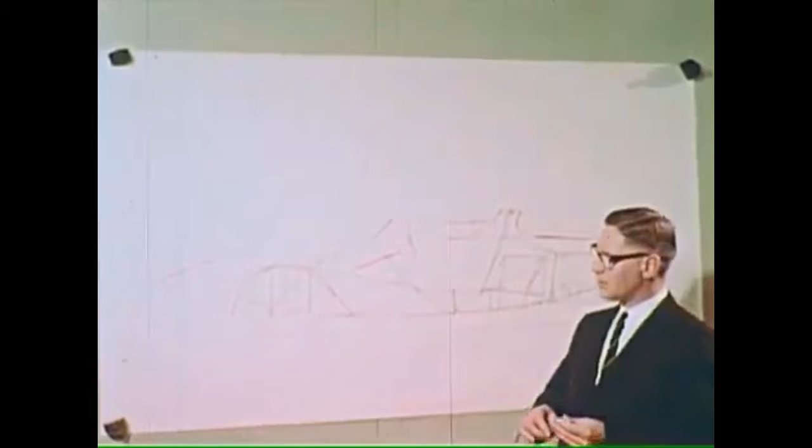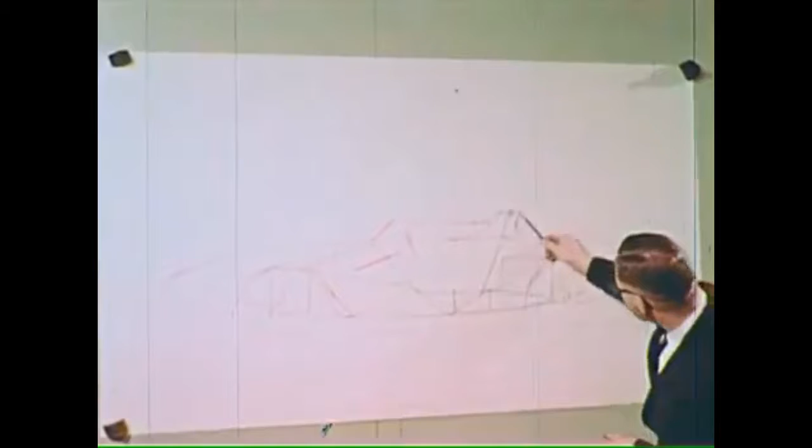He explains that his group, in collaboration with Ford's advanced stylists, have in mind certain features potentially useful in a variety of models, which could best be developed and proved out in a sports car type vehicle. He is thinking of aerodynamically clean body shapes with improved seating positions, lighter weight but stronger body structures, midship engines with proper cooling, and better handling qualities and road holding ability.

The other group in the center associated with the creation of this research vehicle was the Advanced Styling Studio, and it was here the functional aerodynamic body was designed. The low-drag, clean front end was shaped, and a safety roll bar was incorporated in the styling concept.

The efforts of the styling and engineering groups were given executive support by the vice president in charge of styling, Gene Bordinat, and the vice president in charge of engineering, Herb Misch. Together, these division heads endorsed the project.

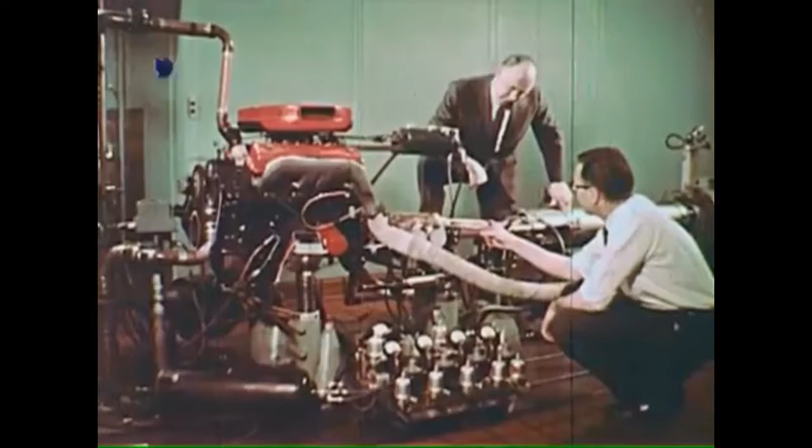Having selected a sports car configuration, Roy Lunn's group set themselves additional objectives. They would design a high-performance two-seater that would conform to Racing Category 9 of the ruling Fédération Internationale de l'Automobile and to Sports Car Club of America regulations.

Because it was purely an experimental car, the engineers chose to use a welded tubular steel space frame, strong and lightweight, for the Mustang.

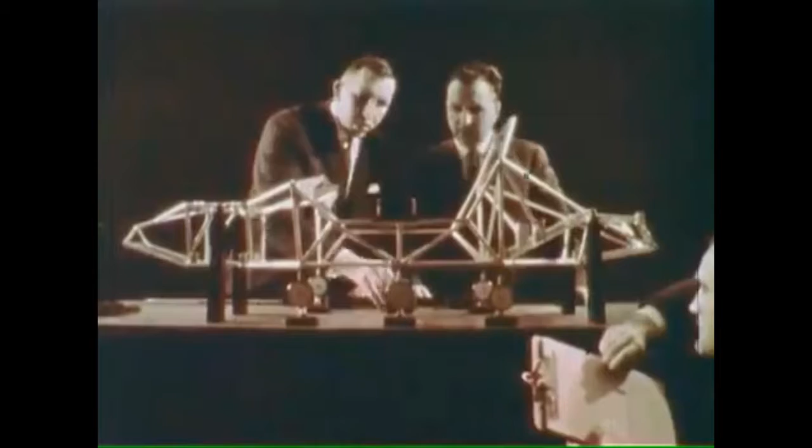The test measurements for the frame were made on an accurate scale model that provided data easier and faster than calculating the many stresses. The model is detailed down to the attachment brackets for the front and rear suspension members.

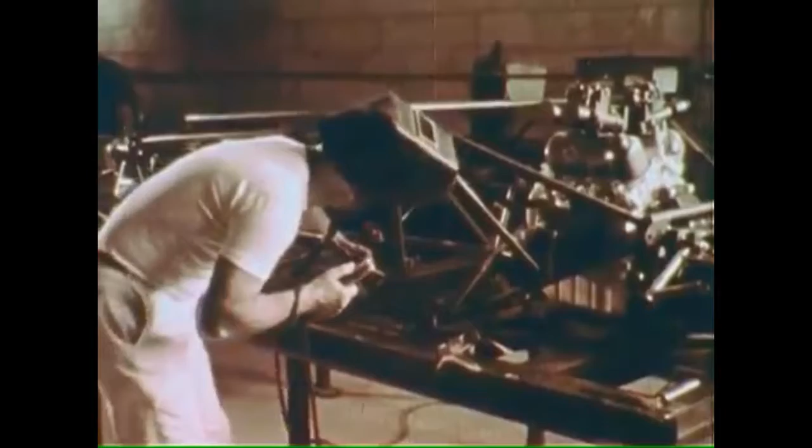The actual frame was fabricated in California by the custom car builders Troutman and Barnes. In addition to being both lightweight and strong, the space frame can be built quickly.

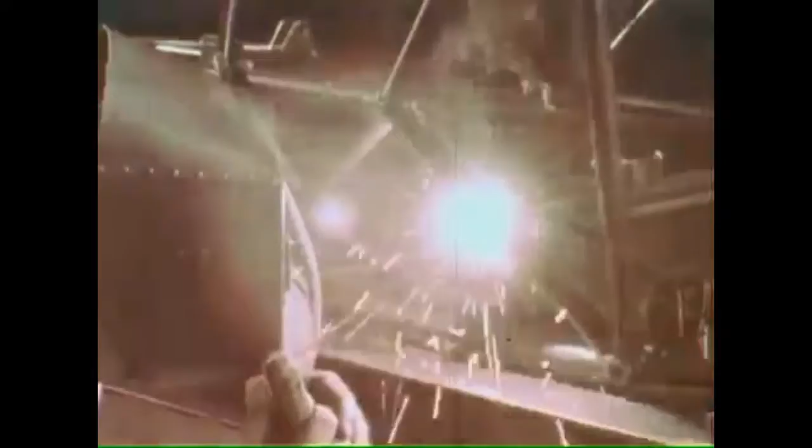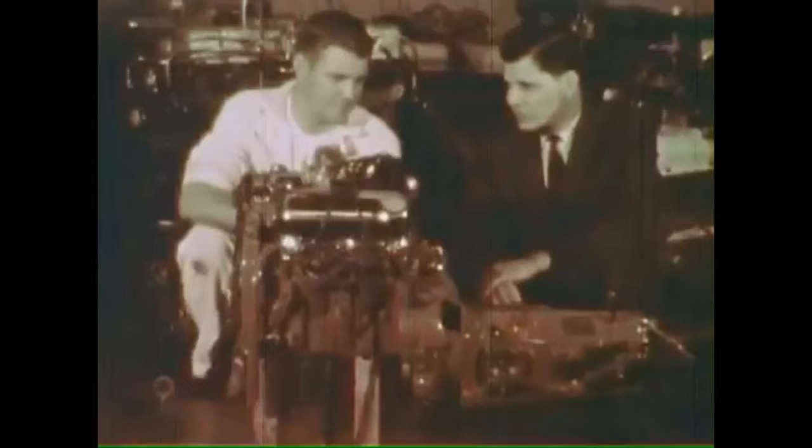The engine and transmission pose no serious problem. Ford's recently developed V4 engine and 4-speed transaxle combination, designed for front-wheel drive in the German Taunus 12M, proved a perfect solution.

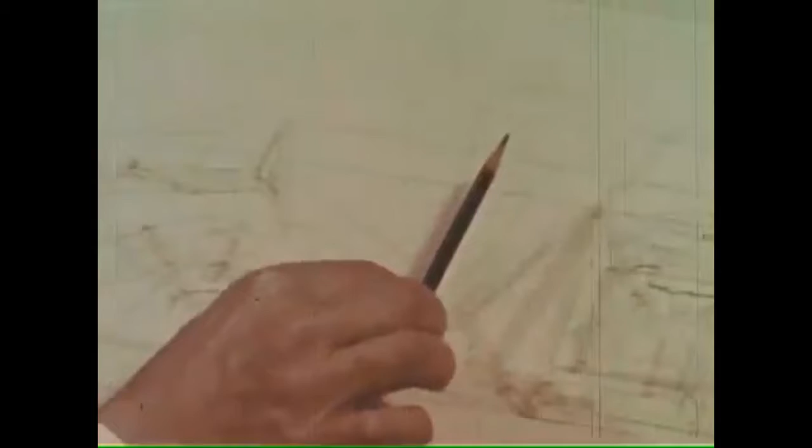While unsuited for forward mounting because of the Mustang's small frontal area, the engine moved to midships not only made reduced frontal area possible and therefore allowed better aerodynamic form, but made for excellent weight distribution because it could be placed forward of the rear axle with no change in the drivetrain.

With modifications—new cam, distributor, higher compression head, intake manifold, valve springs, and carburetors—this engine had excellent performance possibilities.

The design of the clean, small frontal area body that would be a two-seater and have a midship engine, of course, fell to styling. And after many preliminary drawings, the final design evolved.

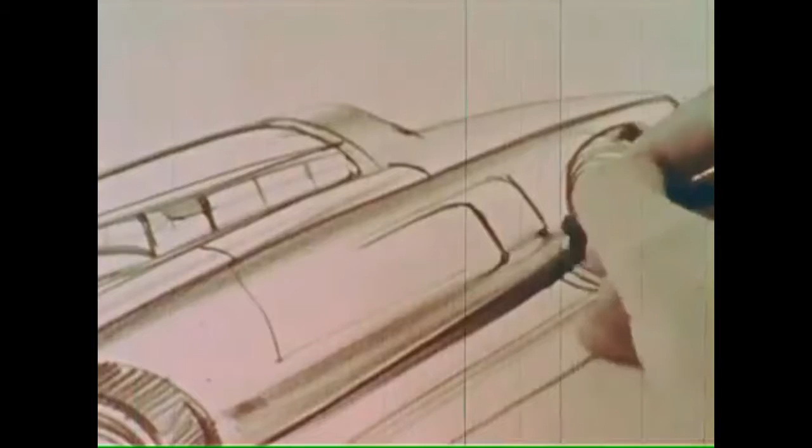Clean entry, stylized roll bar, functional air scoops at the sides—a body that housed and reflected the car's advanced engineering ideas.

Of course, the car needed a stylized embellishment to capture the spirit of the Mustang in its crest, and this was rendered first on paper, then in clay and wood, finally in metal.

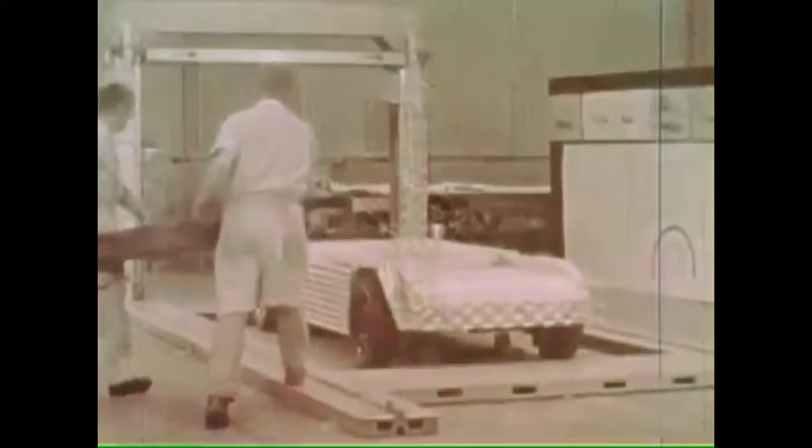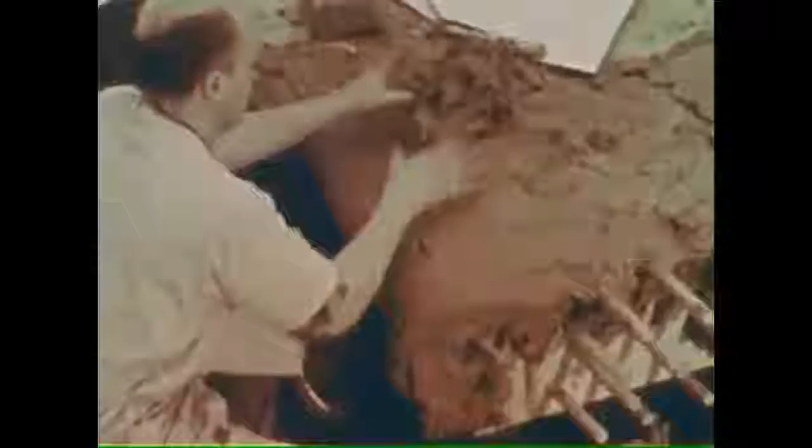The special body was first developed in clay, starting with a wooden form called an armature, which helps make a faster, lighter, and less expensive model. Special hot modeling clay is pushed and formed over the armature, hot because when cool, the clay becomes firm and hard, perfect for precise modeling.

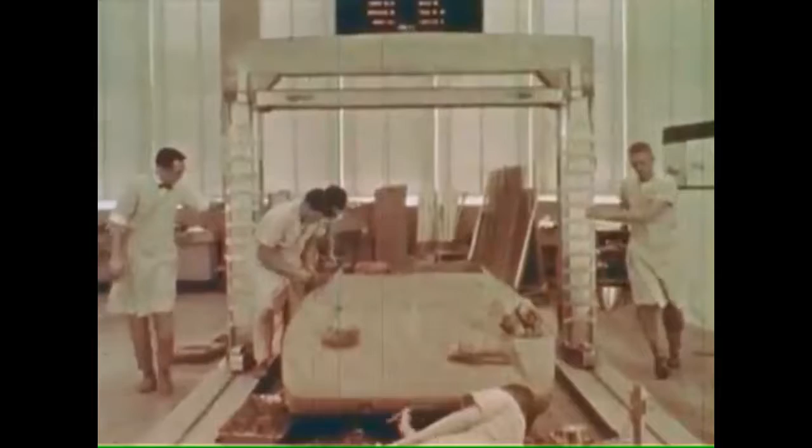A special bridge mounted on rails ensures that each contour of the side being modeled is accurately transferred to the other side.

Skillful hands and watchful eyes of the stylists do the rest, ensuring that every long, sweeping curve is true to the evolved design.

When the clay was completed, it was covered with a special plastic sheeting called Di-Noc, which looks like painted metal, yet can be applied in a fraction of the time it would take to do a similar job in the paint shop.

The American racing colors, white and blue, were chosen for the Mustang. When Herb Misch and Gene Bordinat saw the completed clay, they were delighted.

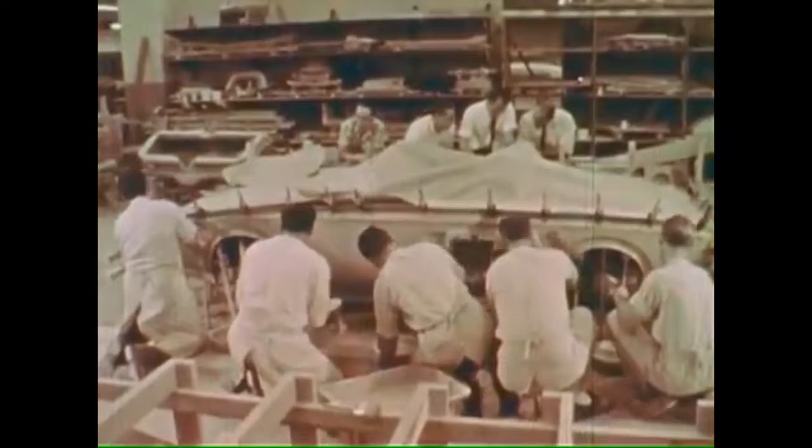With the clay approved, a female plaster mold was formed. The clay was first coated with a parting agent, then with a lime slurry, then covered with Excelsior dipped in plaster.

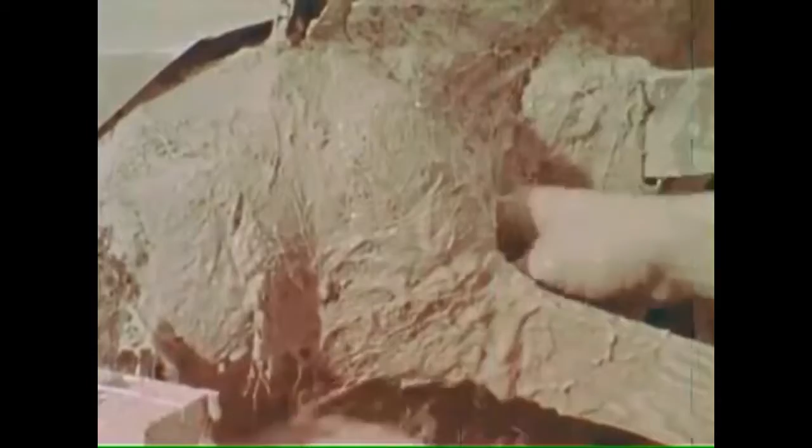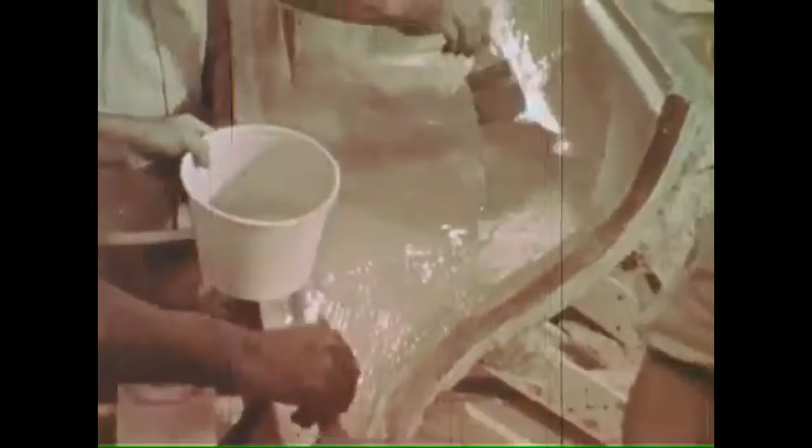When hard, these plaster molds were removed. The fiberglass body form was made by coating the mold with resin, after properly treating the plaster surface, then applying glass cloth over the resin coating.

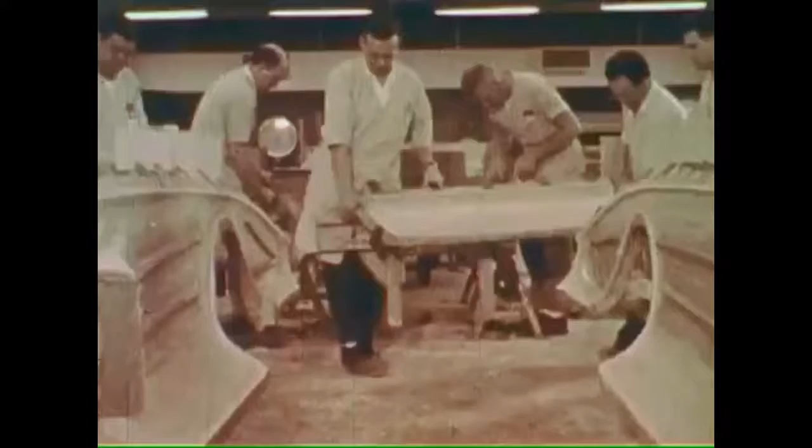Smoothing the cloth to fit the contours. After several layers of cloth and resin had been laminated, the forms were pushed back into place. When all the forms were joined and the fiberglass and resin laminate had cured, the molds were removed and the accurate fiberglass body form was finished.

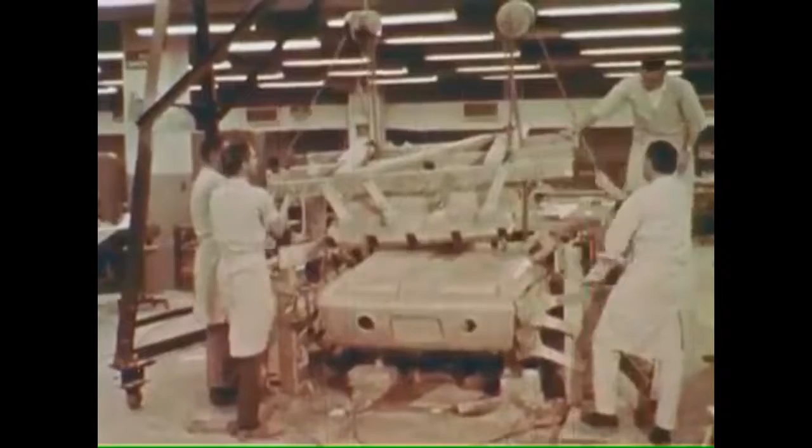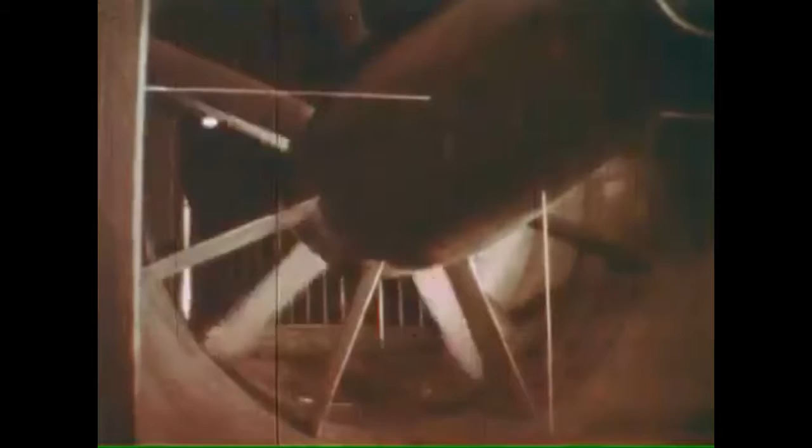After being cleaned up and painted, the fiberglass body form was subjected to wind tunnel tests. The tests confirmed the car's clean aerodynamic design and proved the effectiveness of the side intake vents, which are located at high pressure zones in the airstream.

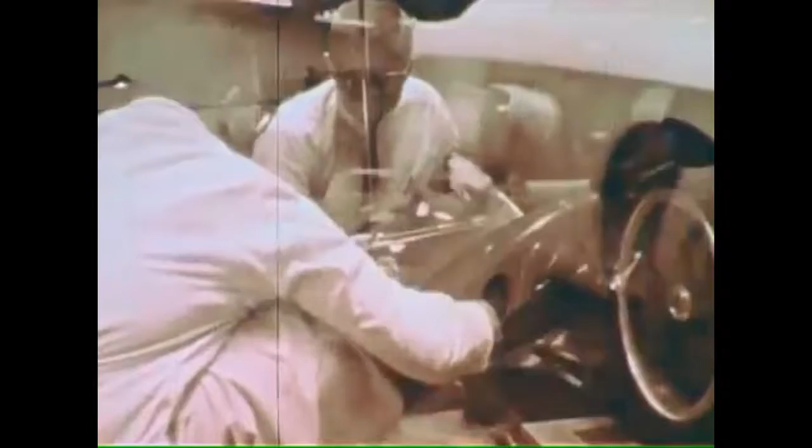Following the wind tunnel tests, the fiberglass body form was sent to Troutman and Barnes. Complete plans, specifications, and all component parts accompanied the car. Roy Lunn checked every part with the builders to ensure that everything would function properly.

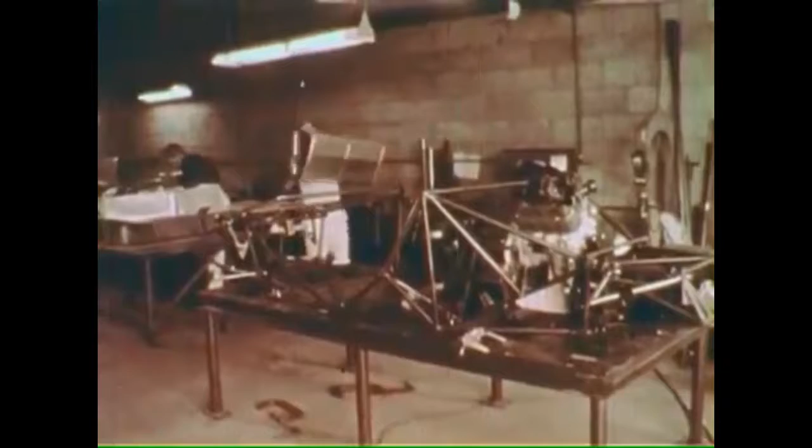The body was designed as a semi-unitized construction with the frame, which was now completed. The aluminum tank was installed, as were the one-piece special seats that were designed to be an integral part of the body and frame.

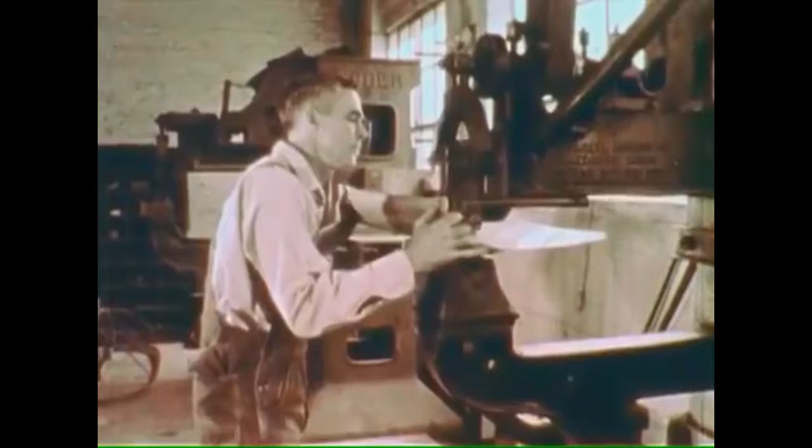The remaining body panels were formed under the watchful eyes of these expert West Coast bodybuilders, and their talented hands and hammers coaxed the aluminum into precise and graceful shapes.

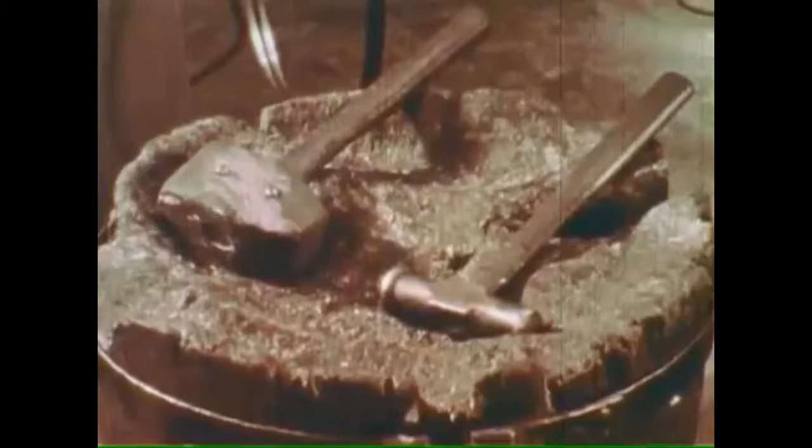When finished, each of the aluminum body panels was carefully fitted to the fiberglass body form to ensure accuracy before they were to be joined and welded to the frame.

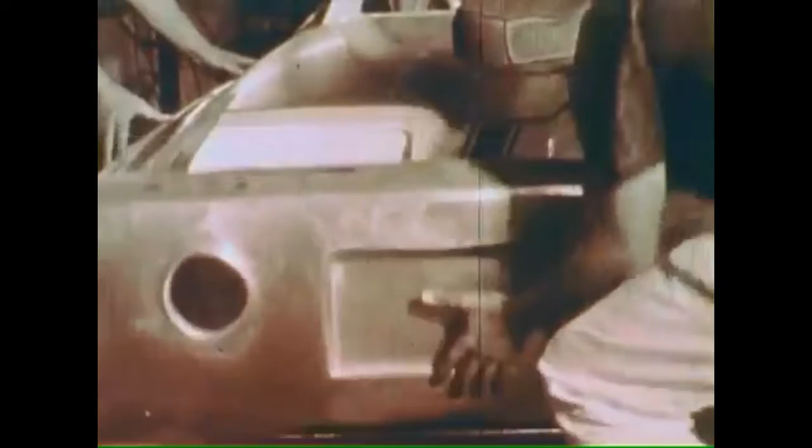The completed aluminum body was flown to Dearborn, where the Mustang was finally assembled.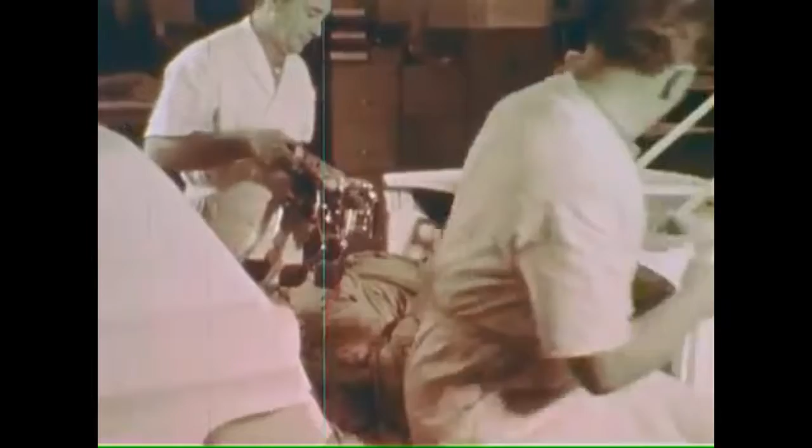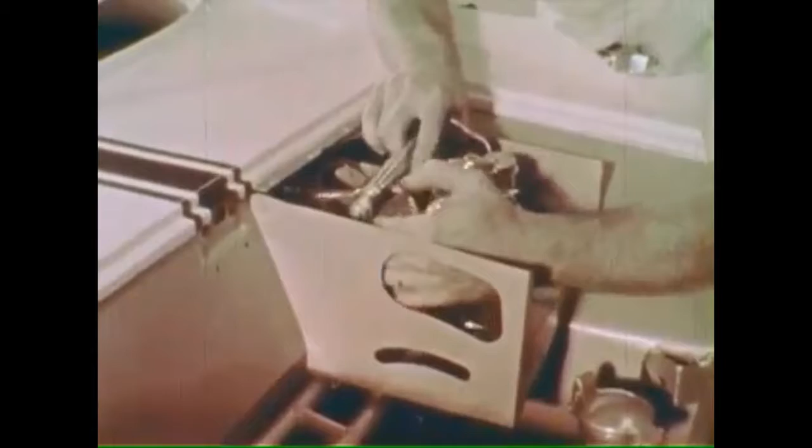First of the advanced features to be installed in the car was the adjustable pedal mechanism, providing for varying sizes of drivers. The brake and clutch master cylinders were mounted on the same unit and connected to the body by flexible hoses.

A one-piece competition windshield was put in place. The large, easily visible instruments were mounted in a padded dash with a built-in grab handle.

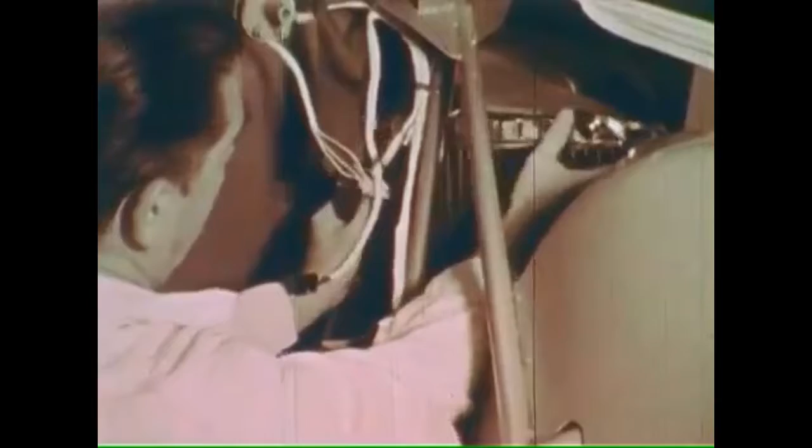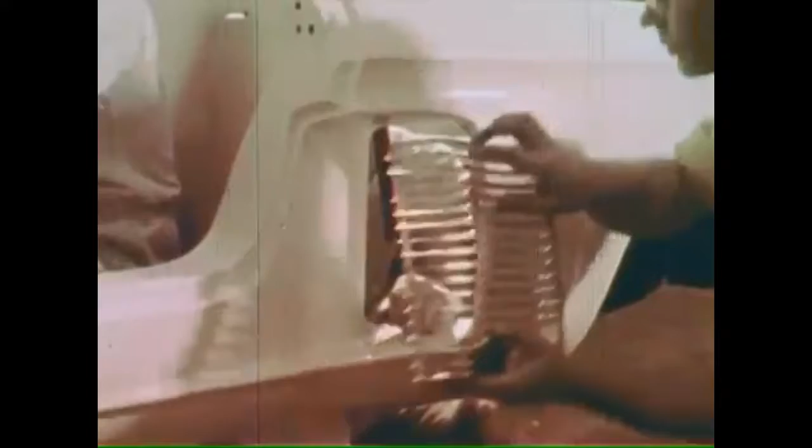To cool the engine, two special radiators were installed. Each was equipped with a thermostatically controlled fan, and each was placed behind a side intake vent.

Including the seats as a part of the body structure was an idea likely to see application in many kinds of future production cars. In addition to strengthening the body, it allowed clean, lightweight seat cushions with built-in headrests that easily could be fixed to the body, and safety belts which readily could be made retractable.

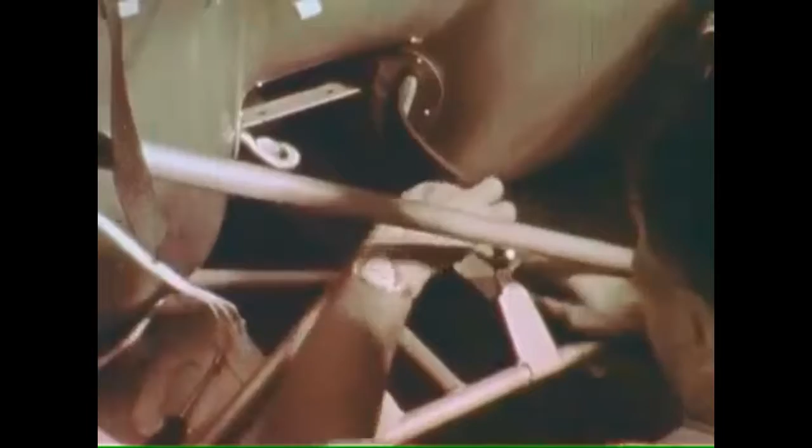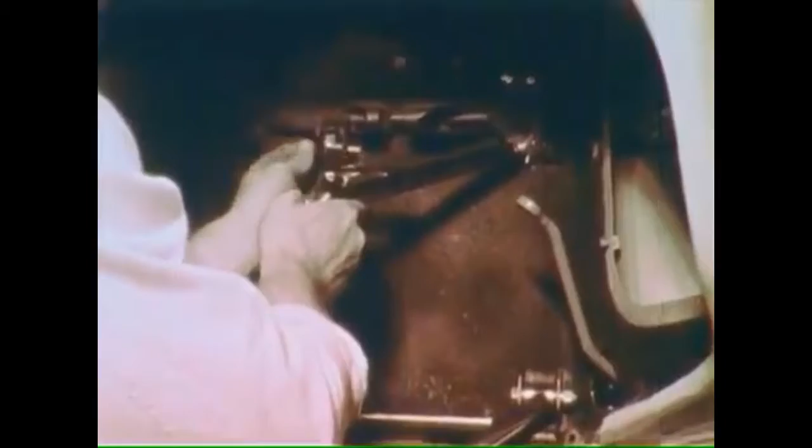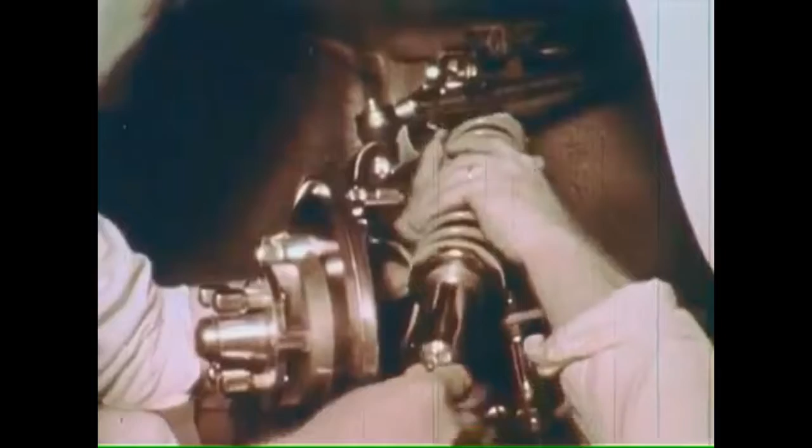Special A-frame independent suspensions were designed for all four wheels. Those in front were equipped with 9.5-inch disc brakes adapted from the Ford Consul manufactured in England. Combined spring and shock absorber units were installed all round.

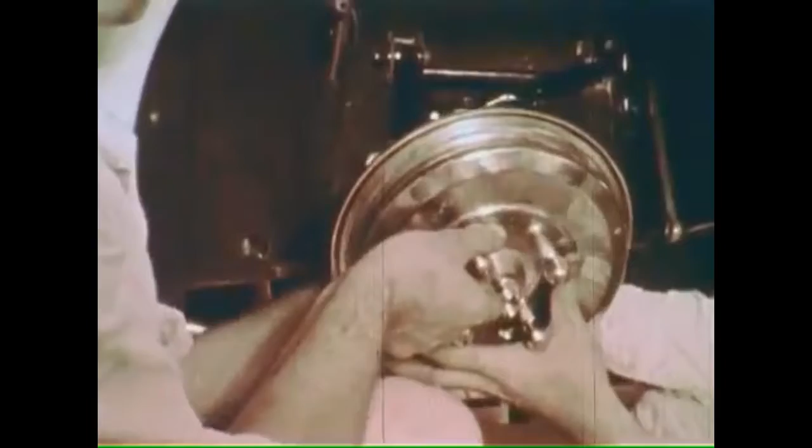In the rear, standard 9-inch drums, also from the English Consul, were fitted. And a new and unique steering assembly was designed, which has a rack and pinion steering gear, a flexible shaft, and 3 inches of fore and aft adjustment.

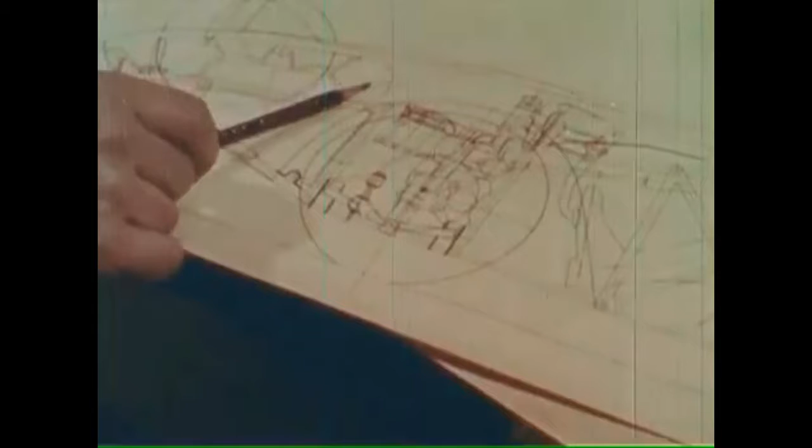The retractable headlights, spare tire, battery, and gas tank are up front. Access to both front and rear compartments was provided, with front-hinged doors on either side. Exhausts through the rear, and all necessary lights were provided.

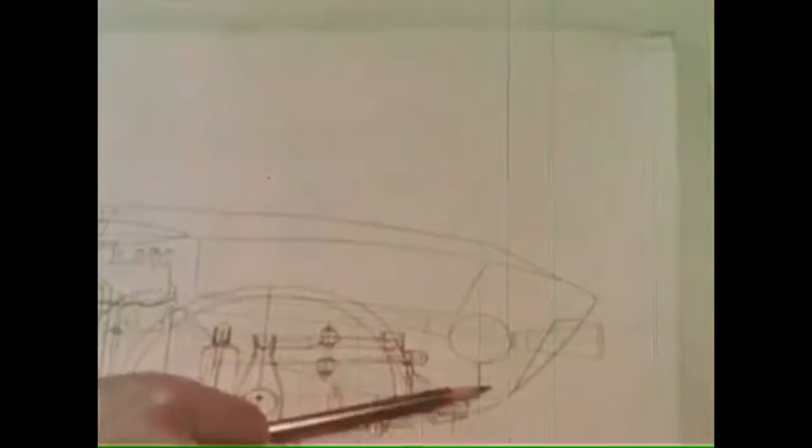And so the car was completed, ready for testing.

Ford's top executives reflected their surprise and delight in seeing this research car put through its paces for the first time. There was good reason for their interest and pleasure. Its advanced features made a lot of sense. They proved completely functional, added styling appeal, and could be applied to many of the company's future products.

Although advanced features, such as those incorporated in this development, are usually kept as company secrets for competitive reasons, Ford recognized that this particular research vehicle, being in sports car configuration, would have wide public appeal. The decision was made, therefore, to show the car publicly as a candid example of advanced automotive engineering and styling, an example of the exciting kinds of projects in which Ford automotive engineers and stylists are engaged.

Stirling Moss greeted the crowd at the premiere showing of the Mustang at Watkins Glen, New York, on a leisurely lap before the start of the United States Grand Prix.

Car and Driver magazine was one of the first of many publications to recognize the engineering and performance potential of the Mustang, and its technical editor, Jan Norbye, was invited to test the car. Roy Lunn went along to answer questions.

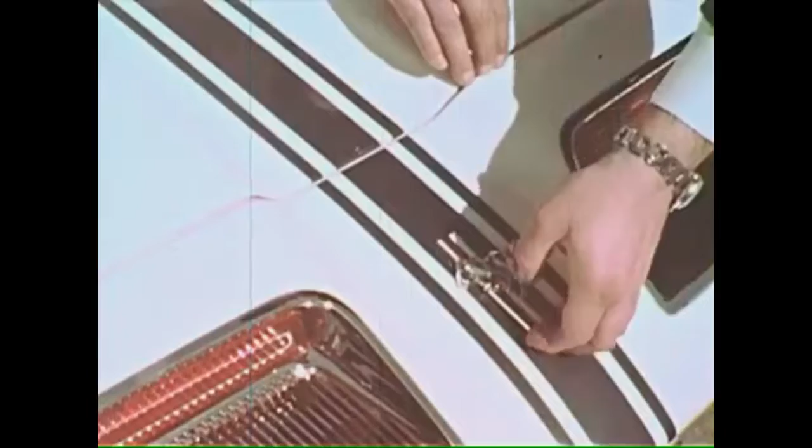Derived from the new German Ford Taunus 12M engine, this road version has a single carburetor, high-speed cams, 11:1 compression ratio, a 60-degree V4 block of 92 cubic inches, alternator, twin radiators, 4-speed synchromesh transmission, and transaxle with independent suspension and drum brakes.

The radiator scoops are located at high pressure areas on the body. For normal operation, the cooling is by ram effect. Otherwise, the thermostatically controlled fans come into play.

The cockpit has a complete set of color-coded instruments in its padded dash, including tachometer, oil pressure gauge, ammeter, and water temperature indicator. The steering wheel has 3 inches of fore and aft adjustment. The pedals are adjustable and can be moved back and forth 4 inches by means of an easily accessible handle.

The gear shift lever is located on the central console and operates 4 fully synchromesh forward gears and 1 reverse. The handbrake is of the fly-off type. Horn, choke, and directional signal controls are also on the console.

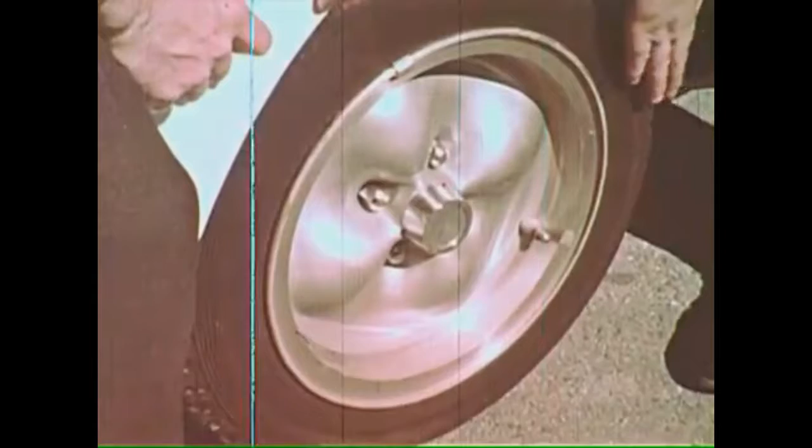The wheels are magnesium to reduce unsprung weight, and the tires are 5.50-13s. The spare wheel and tire are up front, where their weight will do the most good, as are the floor-mounted battery, the rack and pinion steering gear, 13-gallon fuel tank with flip cap, and horns on either side.

The master brake cylinders are part of the movable pedal unit and move with it.

For the cleanest possible front entry, the headlights swing through 180 degrees for night, a legal height above the road, and go flush for daylight driving. Similarly, the license plate can be flipped down for normal driving or folded away for racing.

As a sports car, the Mustang demonstrated excellent roadability on the closed-circuit road course at Daytona Beach. Its fully adjustable suspension was responsible for its optimum road handling and road holding characteristics.